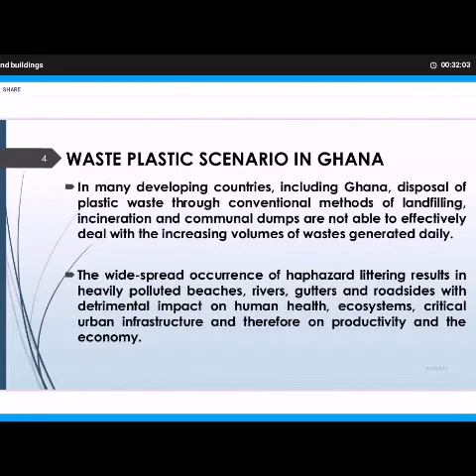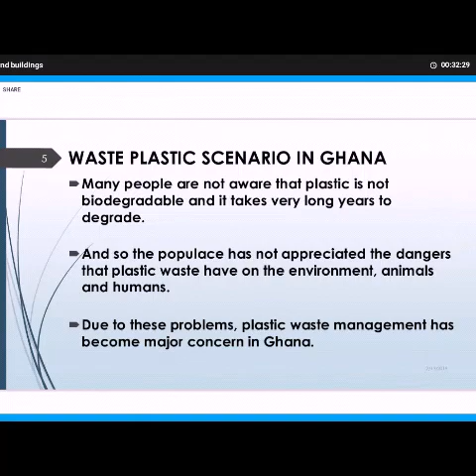Many people are also not aware that plastic is not biodegradable and that it takes a very long time to degrade. The populace has not appreciated the dangers that plastic waste have on the environment, animals, and humans. Due to these problems, plastic waste management has become a major concern in Ghana.

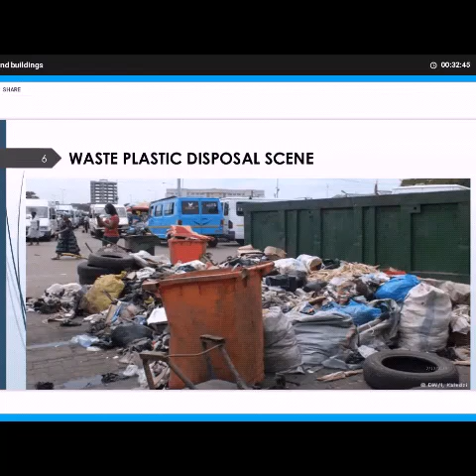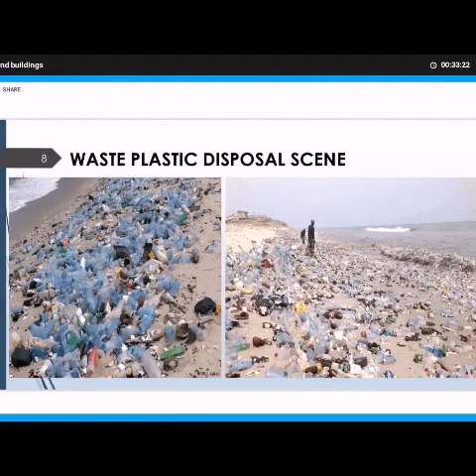The Environmental Protection Agency, EPA, has revealed that 17.7% of plastic waste materials generated in the country finds its way into the oceans and wreaks destruction of marine natural life. Fishermen complain all the time about harvesting more plastic waste than fish, and sometimes dead fish are found floating on rivers and seas, believed to have died as a result of consuming waste plastic.

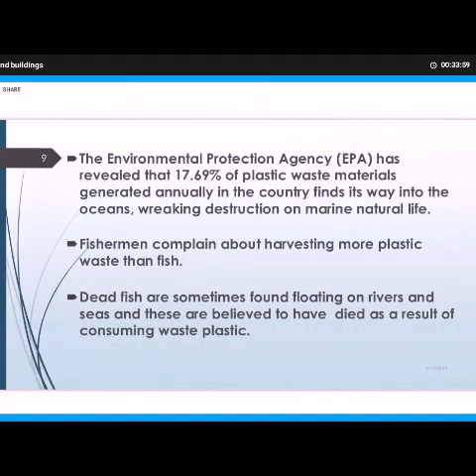In some fishing communities, the entire shoreline is covered with filth, which includes waste plastic. Fishes brought out from some of the seas are kept at these beaches, and there's a low craving for purchasing the fish due to the unhygienic surroundings where the fishes are kept. This is killing the business and livelihood of the fishermen affected.

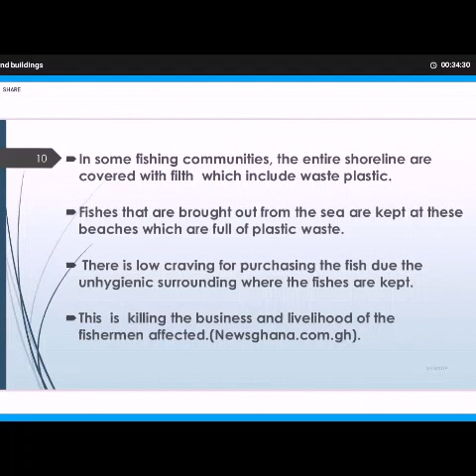About 85% of the solids dredged from choking gutters in some environs are made up of sachet water, plastic, and food wrappers, contributing to causes of perennial flooding in cities in Ghana. This poor and clogged drainage creates breeding places for mosquitoes and flies and leads to outbreaks of cholera, malaria, and many other diseases. There's also smell, which is very common around some of these drains.

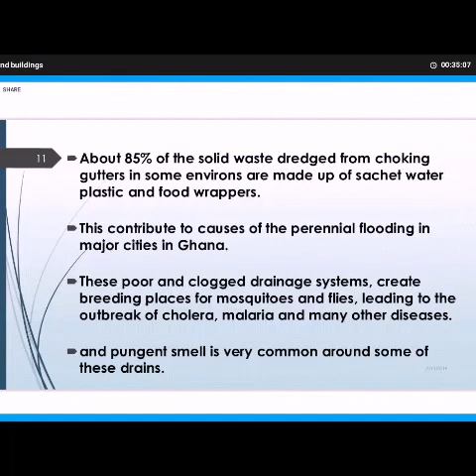There are documented cases of cholera outbreaks in some major cities of Ghana, with some deaths recorded, which were reported to have been caused by poor management.

In 2015, more than 10 people lost their lives when the capital city Accra was flooded as a result of heavy downpour. The flooding was believed to be caused by choked gutters, clogged drains, due to accumulated waste plastic dumped or blown into them.

Some other cities, for example Kumasi in 2018, had reported cases of flooding in some areas during heavy rainfall. As a result of clogging of drains with plastic waste, the flood waters could not flow freely through. This resulted in disasters where lives were lost.

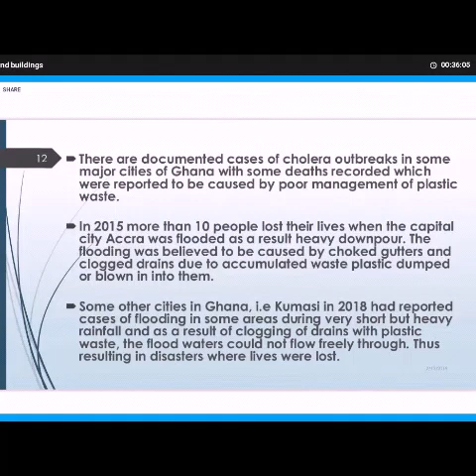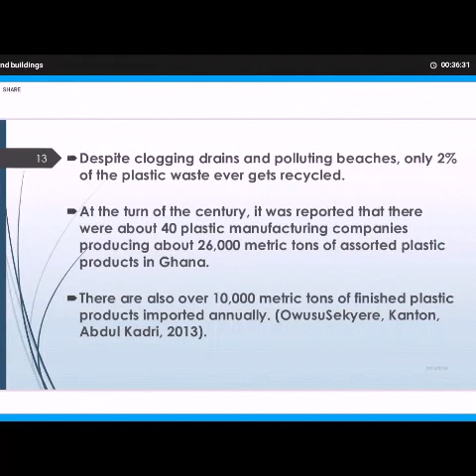Despite clogging drains and polluting beaches, only 2% of plastic waste ever gets recycled. At the turn of the century, it was reported that there were about 40 plastic manufacturing companies producing about 26,000 metric tons of assorted plastic products in Ghana. There are also over 10,000 metric tons of finished plastic products imported annually.

The Waste Management Department of the Kumasi Metropolitan Assembly, KMA, and other waste management bodies indicate that about 16.5% of waste generated daily is plastic, with PET bottles forming about a third of it.

The Accra Metropolitan Assembly indicated that out of the over 2,500 tons of waste generated daily, only 1,500, representing 60%, is collected and sent to landfill sites. The remaining 40%, of which the majority is plastic, is left uncollected. This normally causes various health problems in the municipality and the country as a whole.

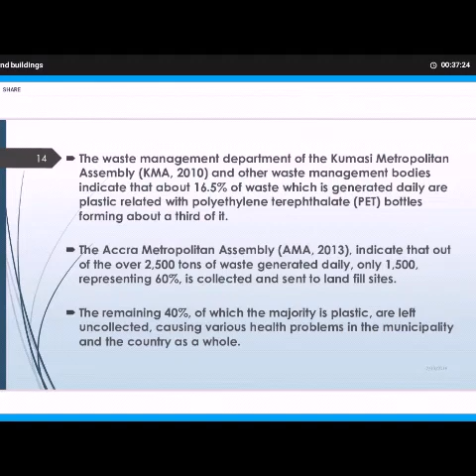Zoomlion is a waste management company in Ghana, and this company collaborated with Accra Compost and Recycling Plants and agreed to export PET bottles for recycling in 2013. The collected waste are initially carted to refuse dumps, and this forms huge heaps in the long term without proper recycling, and this poses an immense challenge to the environmental quality as they end up impeding storm drain channels.

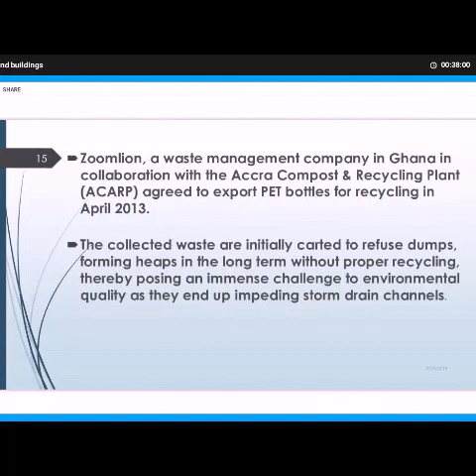Now, what are some of the efforts made by governments and other institutions? Here, just a few are listed. There was a decision to ban light plastic materials with less than 20 microns from November 2015 in Ghana by the Ministry of Environment, Science, Technology and Innovation as part of steps being taken to enforce laws governing the production

and uses in Ghana. Again, a recent meeting of stakeholders in the manufacturing industry have called for a ban on light plastic materials that are between 20 and 30 microns, as these have been reported to cause more harm. But the ban has not been implemented.

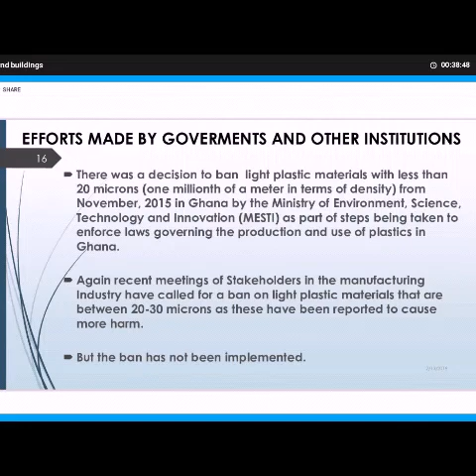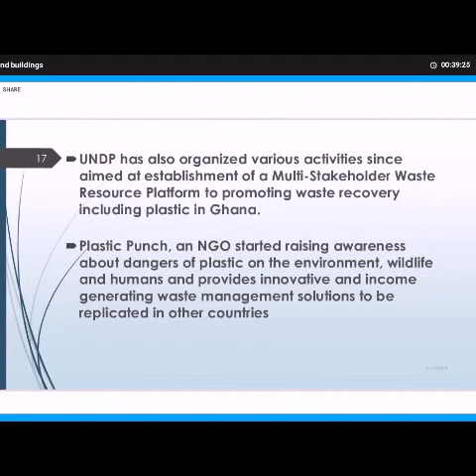UNDP has also organized various activities aimed at establishment of a multi-stakeholder waste resource platform to promote recovery, including plastic waste in Ghana. Plastic Punch, an NGO, started raising awareness about dangers of plastic on the environment, wildlife, and humans, and provide innovative and income-generating waste management solutions to be replicated in other countries.

A coalition of private enterprises, that is the Ghana Recycling Initiative of Private Enterprises, from Ghana Association of Industries, AGI, in collaboration with EAP Consult Limited and CSIR-BRRI, is piloting innovative technologies that recycle post-consumer plastics into valuable products which are already in high demand in Ghana and other countries in the sub-region.

The technologies are simple, readily available in Ghana, and require low capital startup and low skilled labor; most of the equipment can be manufactured locally, with the resulting products having a ready market domestically and regionally.

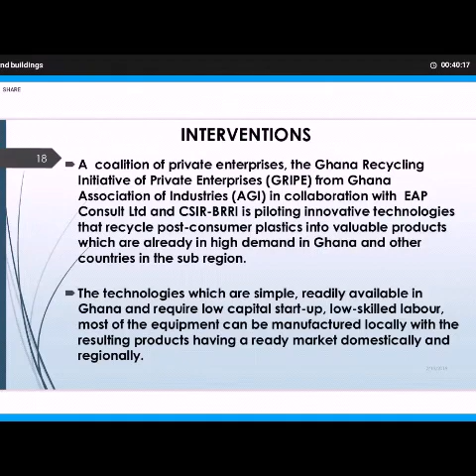Intervention by Council for Scientific and Industrial Research, Building and Road Research Institute. As an institute, our mandate is to take research into all aspects of building and road planning, design, construction and maintenance with a view to assist the construction industry to be more efficient, safe, and economical. We have also been mandated to develop local construction materials for increased utilization in construction.

So for this reason, the Institute has been conducting research activities into the use of waste materials, and for the purposes of this presentation, we are going to consider waste plastic in construction of roads and buildings.

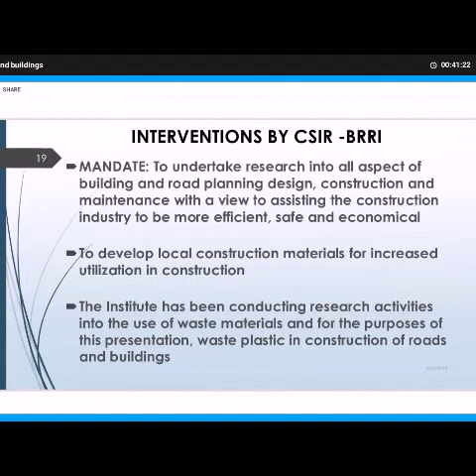Now, some research and development activities with waste plastics in the Institute include various studies: waste plastic as modification of bitumen for road construction, waste plastic as modification of aggregates for road construction, waste plastic bottles as materials for walling,

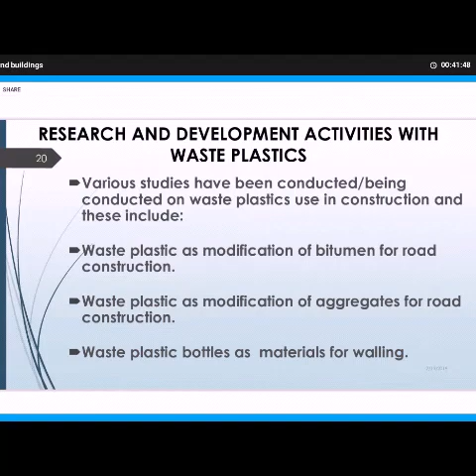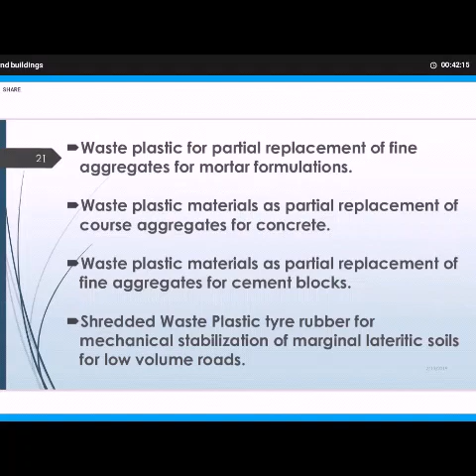waste plastic for partial replacement of fine aggregates for mortar formulations, waste plastic materials as partial replacement of coarse aggregates for concrete, waste plastic material as partial replacement of fine aggregate for cement block, and last but not least, shredded waste plastic tire rubber for mechanical stabilization of marginal lateritic soils for low volume roads.

We are going to now discuss our research findings. Findings discussed here include modification of mortar with waste plastic, that is waste PET and HDPE, concrete with waste plastic, again with PET and HDPE, and then modification of mortar blocks using waste plastic, again PET and HDPE.

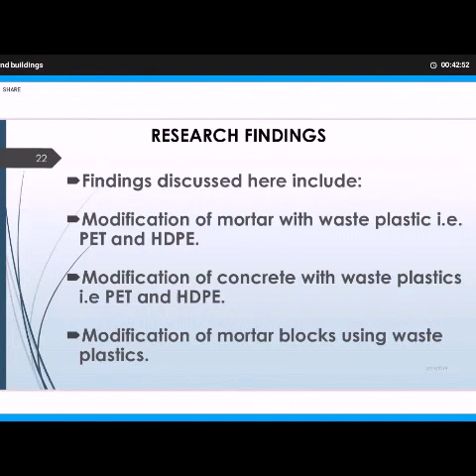So at this point, Delali will take over. Thank you.

Modification of mortar using waste plastic. The samples were produced in accordance with the ASTM standard, and the average size of the materials was found to be below 1 millimeter, and this falls within the acceptable range as per the ASTM C136 standard.

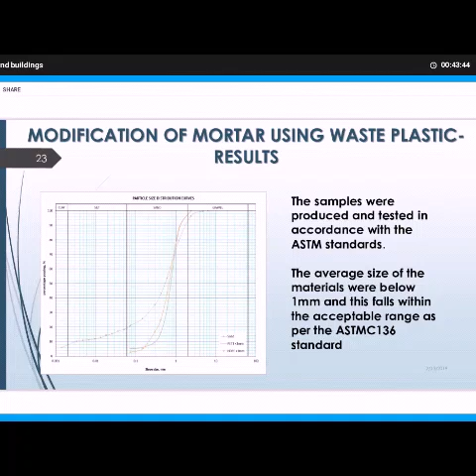The water absorption for most of the replacements using waste HDPE was found to be lower than that of the control. Mortar modified with waste PET was also found to generally absorb more than mortar modified with waste HDPE. However, the absorption of both plastic types and for all the replacements were far less than the maximum.

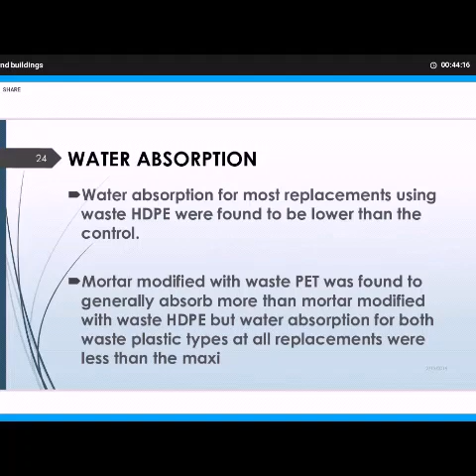However, for the mean compressive strength of PET at 3% replacement, the strength was found to be higher than that of the HDPE at 3% replacement.

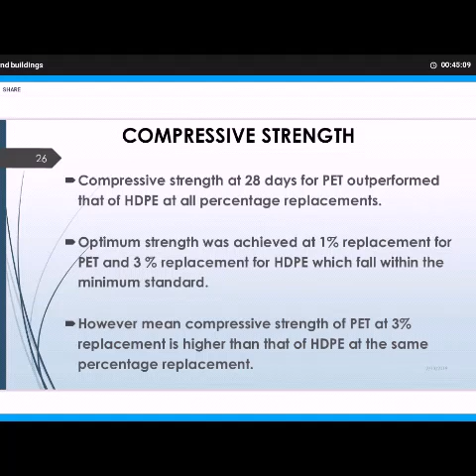Based on the results we obtained, we realized that the percentage replacement should not exceed 3% by weight for both PET and HDPE for mortar formulations. Waste PET and HDPE can be used, but at most 3% replacement in mortar, and this will not compromise the strength of the resulting mortar for construction purposes.

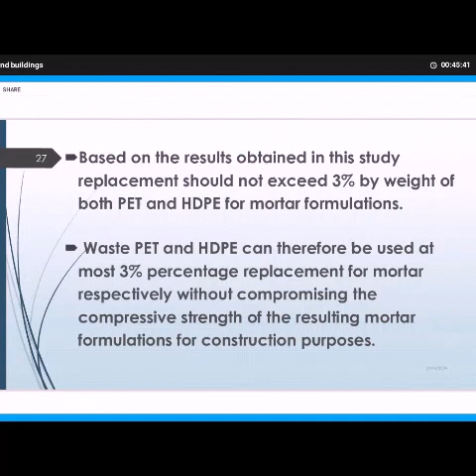I want to continue the presentation, starting with the concrete results. What Delali talked about was just the mortar results. I want to explain how the plastic waste fared when they were added to concrete.

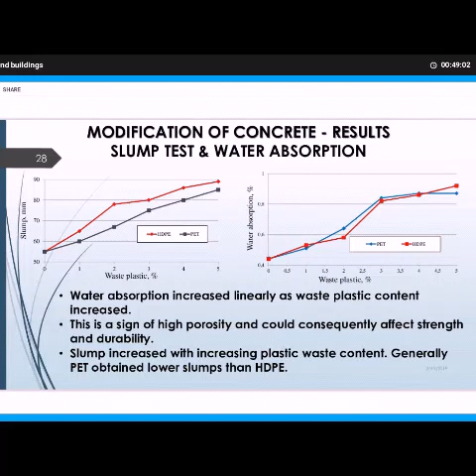But it must be stated that even though the water absorption increased, it was still below the maximum water absorption required, that is 1%. All the replacement levels had their water absorption less than 1%, which is a very good indication. So as we move on, we want to talk about the results for the compressive strength.

Now, compressive strength, when it comes to engineering or construction, is a primary parameter required, because engineers look at strength and they are not always interested in what causes strength, but the strength as they have it on the field. And so, as much as possible, you want to look at the effects of the addition of the waste on the compressive strength. And compressive strength is just the ability of the material to resist load. As you put load on it, you want to see how it's able to resist that load.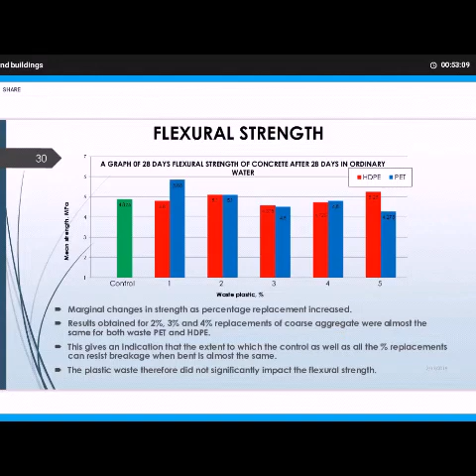So after the flexural strength, we also tried the waste plastic on ordinary blocks, because an ordinary person may not need to go into the lab to do any test. They just do it on the field. And when you go to the field, people do not use laboratory standards. So as much as possible, we tried to replicate what happens on the field with the plastic waste. But since we had already assessed it and knew that our optimum is around 3%, we decided to just work on 2 and 3% and not go beyond 3%.

And from the graph, you realize that the control, that is the material without the plastic waste, is obtaining strength around 5.5. Now the standard for blocks says that you should not get anything below 2.8 megapascal. So the control is having 5.5 megapascal, which is very good, going way beyond the minimum standard. But if you add 2%, the strength increases. For PET, it increased to 7, and for HDPE, it increased to 7.5.

And when you add 3% of the same plastic waste, for HDPE we are seeing 7.22, and for PET we are seeing 6.17, which is very good. They are all going beyond the control. Per the analysis, it could be because of the fine nature of the plastic we used for the plastic block. The plastic waste used was less than 1 mm, sometimes even finer than the sand used. So we believe that because of its fineness, it is able to seal the pores, making it more consolidated and dense and increasing the strength.

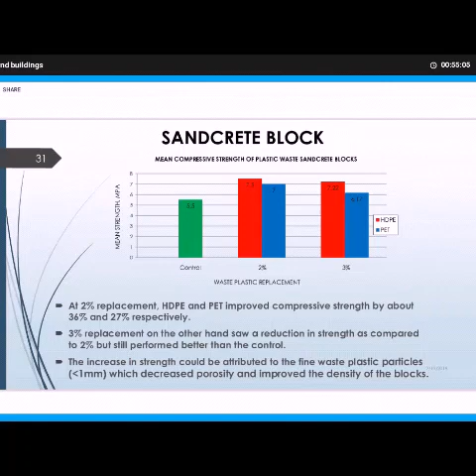So these are just some of the field observations. We also built some demonstration walls in the outside environment, all for durability. We want to see how it fares after it rains on it, after the sun shines on it, after it has been exposed to the environment for a long time. How does it fare in the environment?

So these are some of the pictures. On the top left, you have the HDPE mixed with one brand of cement called Pozo mix, when it was freshly built. And on the right hand side is the current state of the wall. It still looks very much okay. It has not deteriorated, still standing, even though it has been exposed to the environment for more than a year now.

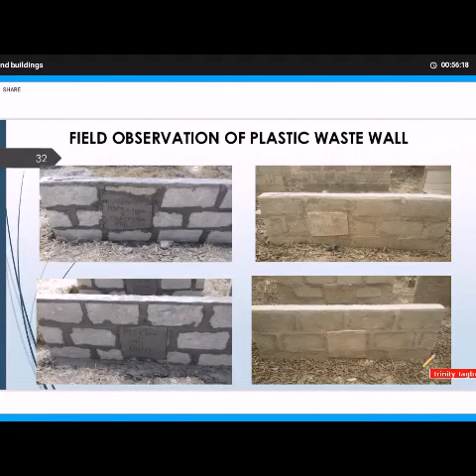And the bottom left is PET prepared with ordinary Portland cement, and that was the state when it was freshly built. And the picture on the right hand side is the state as it is now, still strong and still very much okay. All right.

Okay, so on this slide you can see pictures of waste plastic bottles that have been used to construct. On the left hand side is a partitioning wall found in our offices in BRRI. It was built from the floor level to the ceiling level, and it has been plastered. We decided to leave a small space so everybody can see what was used to build this particular wall. It looks very beautiful, and as of now, it is still standing and has not seen any defects yet.

And on the right hand side, we are building a security post using the plastic bottles as well. We used ordinary blocks for the substructure, and for the superstructure we have started using the waste plastic bottles, and this is the state it is in now. We hope to continue so that it gets to the roofing level.

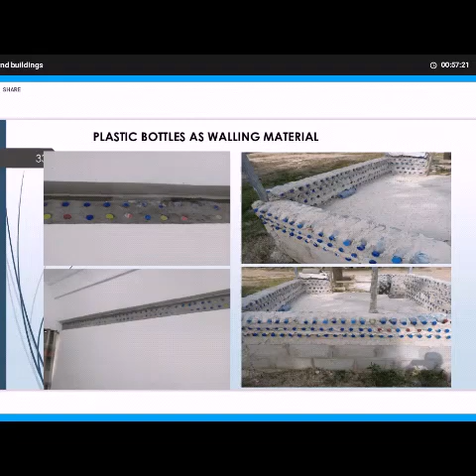So, as you can see, results obtained so far suggest that waste plastic in construction leads to the following benefits. It leads to recovering of valuable resources. It leads to... and these results can be used to raise awareness across society, and this will greatly contribute to a clean and sustainable Ghana.

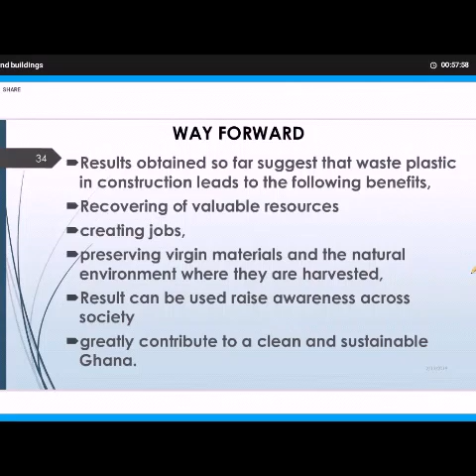So in short, all that we are doing is in this picture. We are using waste plastic combined with aggregates to form coated aggregates for road construction. We are using waste plastic combined with bitumen for road construction. Waste plastic is being combined with sand for pavement blocks. Waste plastic is being combined with cement for mortar formulation and concrete blocks, and this will be used for construction of a toilet facility.

From that, using waste plastic for all this would result in enhanced road performance, as it improves the lifespan of materials in extreme weather and traffic conditions.

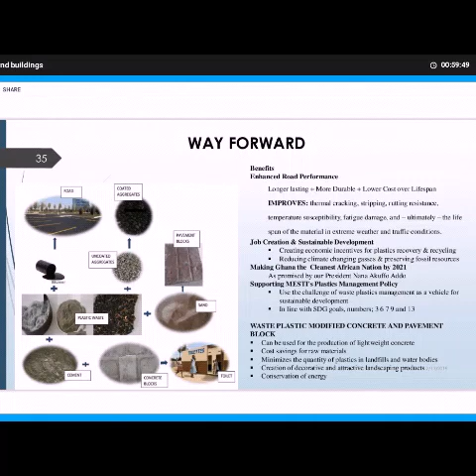Now, with the waste plastic modified mortar and concrete, it can be used to produce lightweight concrete. It minimizes the quantity of plastic in landfills and water bodies, and also conserves energy.

What is the way forward? A 5-seater toilet facility will be constructed using the modified materials, which currently has only a 4-seater toilet facility and is serving about 450 school children and teachers. We are also working with modified mortar, blocks, and concrete. There are also collaborations underway with some other communities to construct roads using waste modified aggregates.

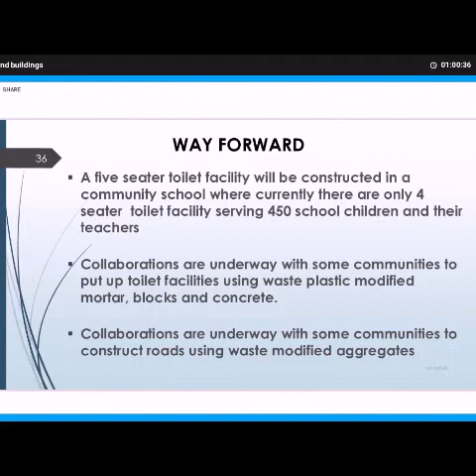Stabilization of lateritic soil with waste tire rubber for low volume roads. We are also continuing with using whole plastic bottles with various soils at various moisture levels as walling material. As we do all this, we are seeking funding, and we are also seeking to collaborate with relevant institutions and researchers in experimental and field pilot studies for grants and exchange programs.

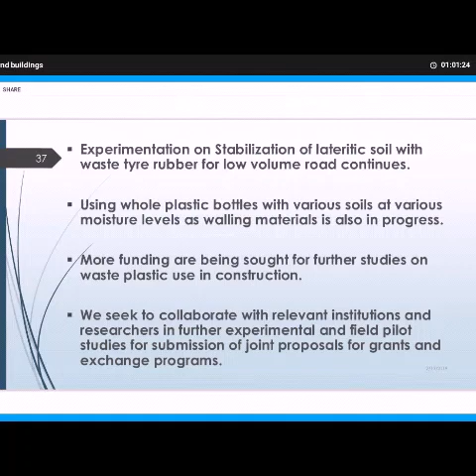We want to thank you all for your attention.